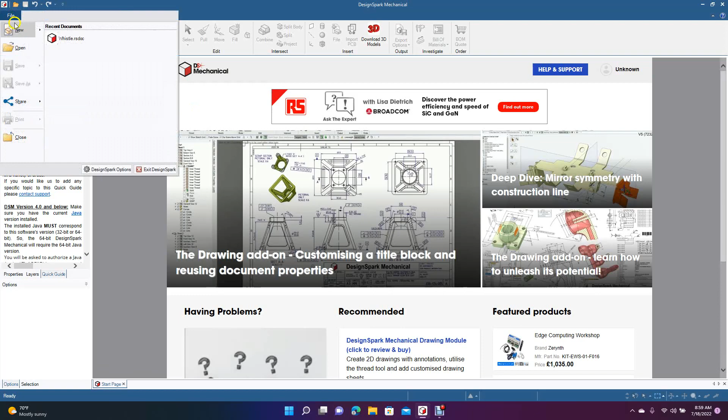So we're going to create a new design, make it plan view so it's flat, then come up to rectangle and define it from the center. We'll click, drag out, and I'll show you how to use the split body command. We're going to make a rectangle 38 by 6, then draw a piece in the middle.

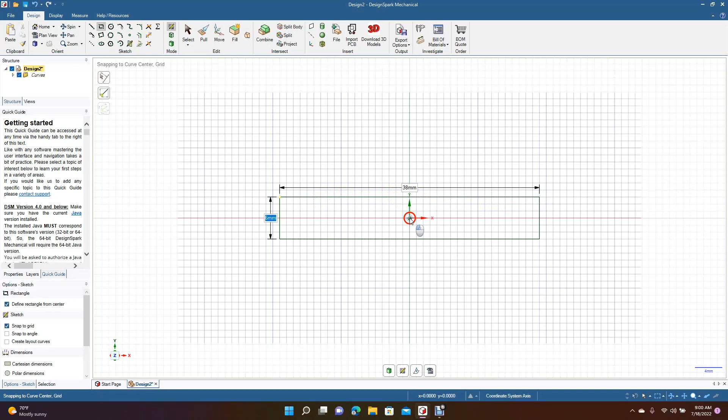We can do the same thing there, go 30 by 8, that's fine. Now we're going to click off, grab our trim away tool, and get rid of these inside pieces.

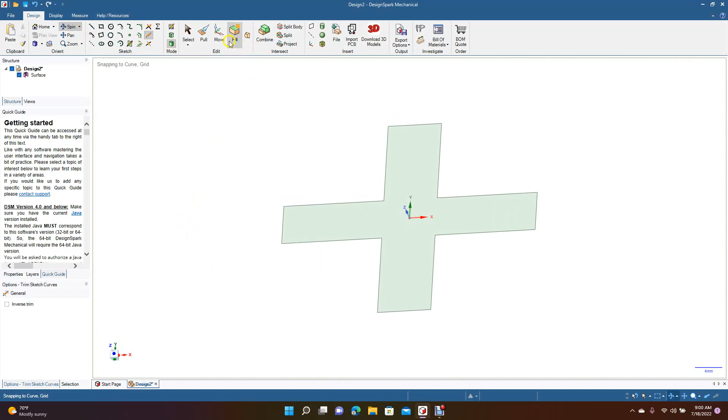Now we're going to go to 3D mode, spin that a little bit, and give it some depth. So we'll go to pull, click on it, and pull this up. Let's undo that - let's click on it and just put 5 millimeters in there. Type 5 and hit enter.

Now I'm going to show you how to use split body. You come up here to this command, split body, and then you'll click here, and then click here. Let's try that again - split body. We'll go here, and then here. Okay, so that cuts a piece here.

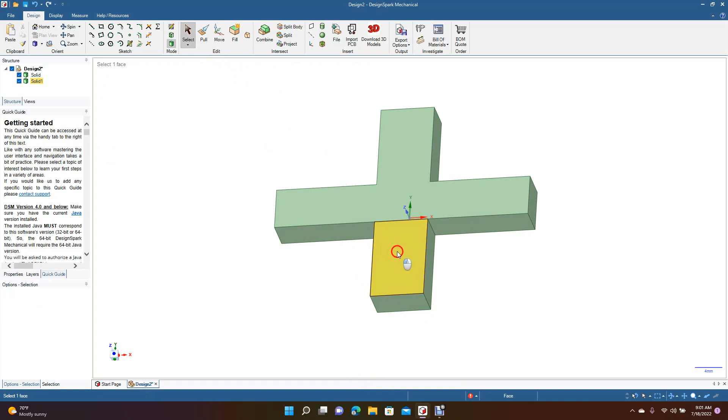So now you have two solids - you have that piece, and then this piece that we cut. So now you can move that piece away, right there.

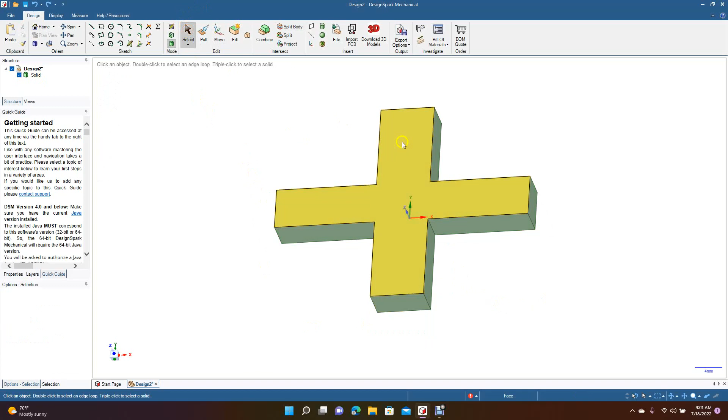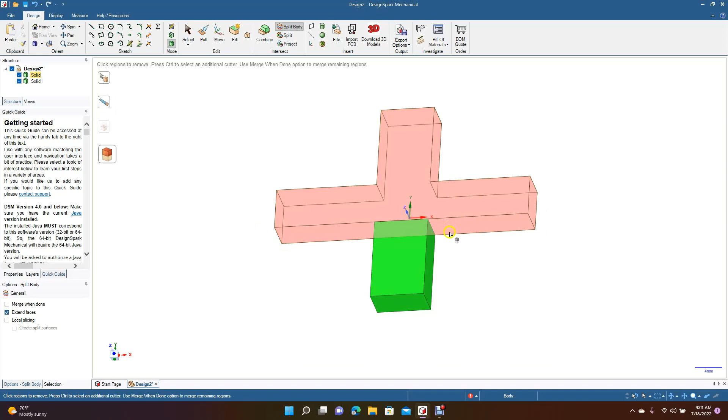Let's go ahead and do that again - we'll undo a couple times to get back to here. This would be your basic shape, and if you want to trim it, you hit split body. Up here it's telling you to click on a target object, so you want it to be this, and then it's asking you to click on a face, plane, or edge loop to use as the cutter. So we'll go here this time, click here, and now it's going to cut along this line.

So now you've got two solids, and you can use this solid to move. Let's grab the green and move that out of the way. You could do the same over here on this piece - you just have to spin it around so you're able to see the top part.

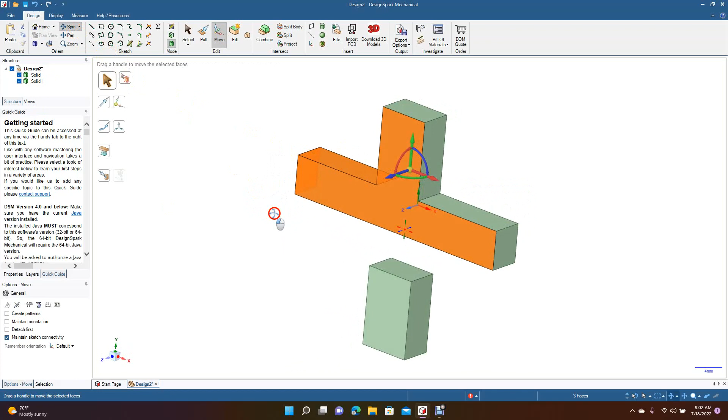So what you could do there is, if you wanted to split that, you go to split body, select this top surface as your target, and click this piece here. And now you actually have 3 pieces, so you should have 3 bodies - that piece there, which we can click on and move, and then the middle piece. So that's the split body feature in DesignSpark Mechanical.

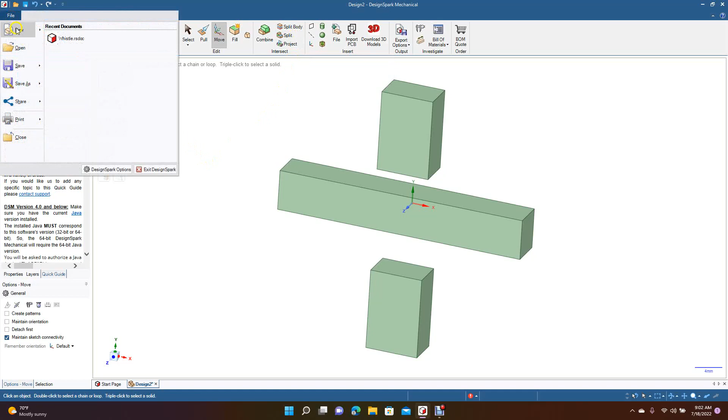Now we're going to create another new document. I'm going to show you how to draw stuff on opposing angles, and you'll know in a minute what I mean by that. We're going to do the same thing in millimeters here, click this plan view, and then draw a line.

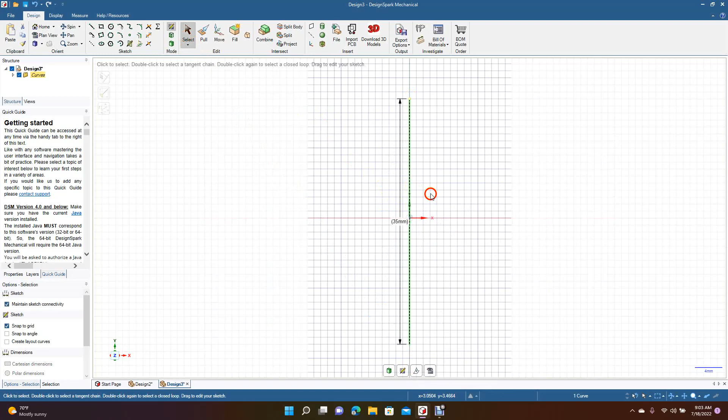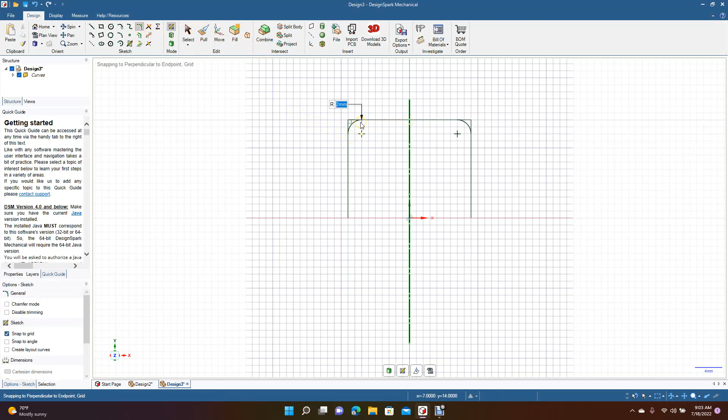So I'm going to put a line in the middle here because we're going to use this as a mirror line. We'll right mouse click on that, set as mirror - actually, right mouse click, turn off that, right mouse click, set as mirror. Okay, now we're going to draw a line up here, straight over. Now we'll come in here and do the create rounded corners, and just do a 2mm line in there.

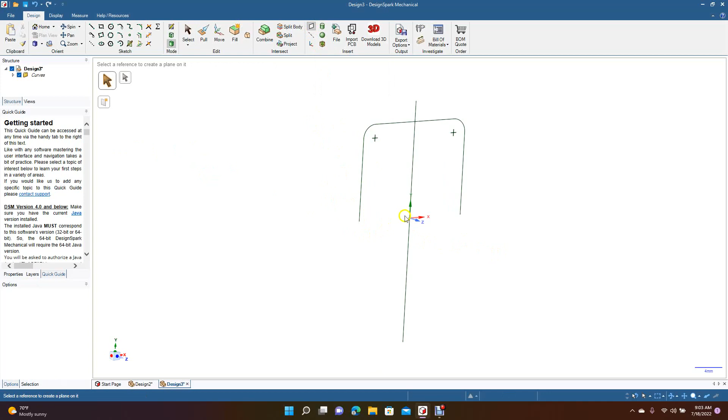And then now we'll go to 3D mode. So what I mean by opposing directions is if we want to make a part and we want the part to be coming out this way, you go ahead and click on your plane. Then you're going to come over here and find the plane that you need to draw on.

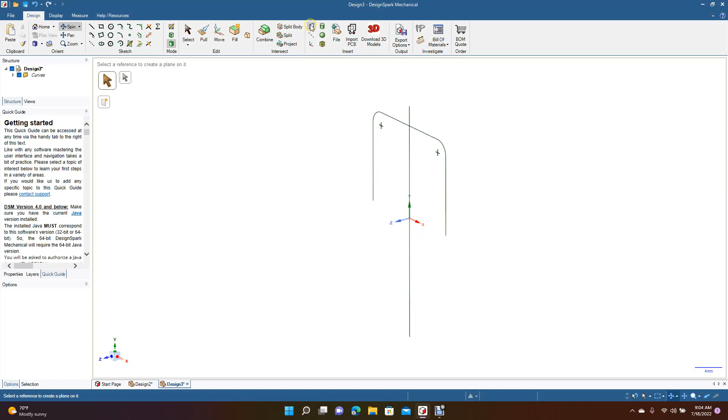Let's spin this some more. Let's go ahead and spin this, spin it this way. Okay, and then we'll go ahead and click the plane up here, and then we're going to go ahead and put...

I think that line is kind of interfering with stuff, so we're going to get rid of our mirror line. Let's just click on it, hit delete.

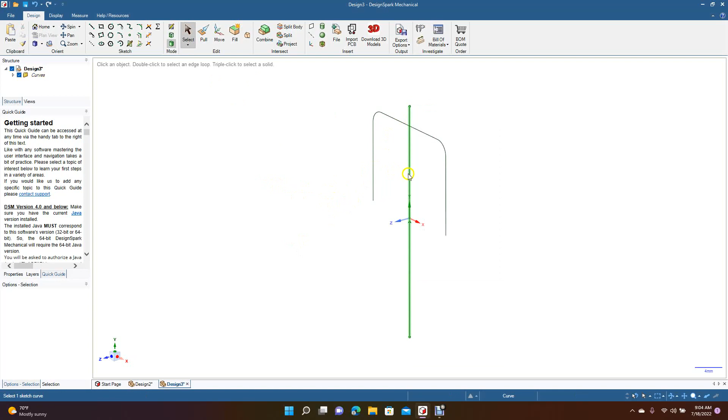All right, now go ahead and go up to plane. Okay, there we go. We want this bottom plane, so just go ahead and click there. We got some extra ones, but we can just get rid of those.

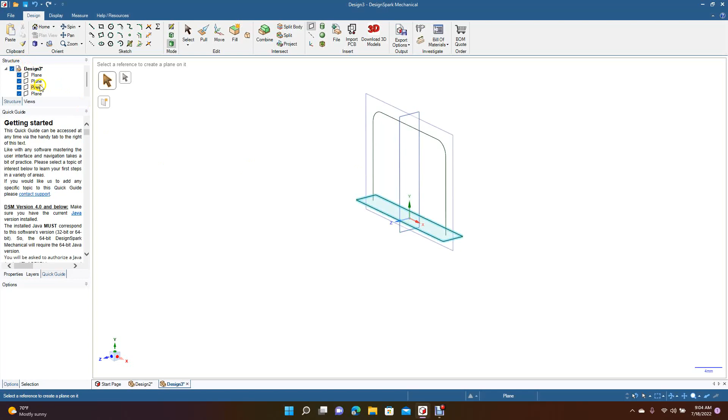So let's get rid of that one, and just come up here in your structure tree to get rid of a plane. We want to get rid of that one, we don't need it, so just hit delete.

Or come over here, select the plane, right mouse click, delete. I don't know why it's not deleting. Let's go to select. Right mouse click, delete. It's kind of weird, it's not deleting our plane.

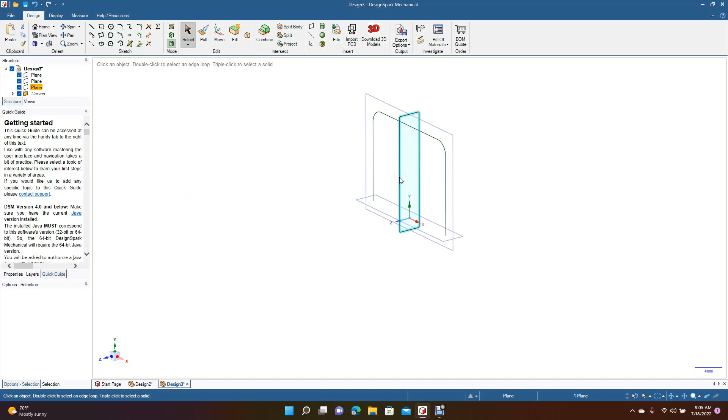Okay, there we go. So now what we're going to do is we have this part here, so we're going to go ahead and rotate this view, rotate it like this. And then we're going to select this plane, and come over here to plan view and make sure that's straight.

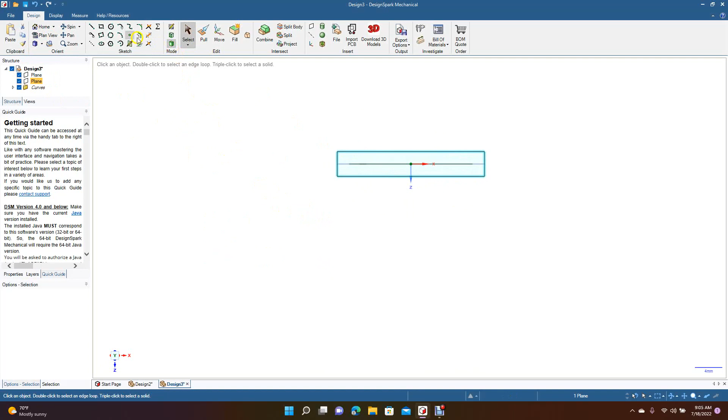Okay, now we're going to go to our line tool, and you're going to find the end of that part there. So now we're going to draw a part going up like this.

Then we're going to come over, and then we're going to come down to the end. Actually, it's over there. Okay, let's undo that, undo a couple of undos.

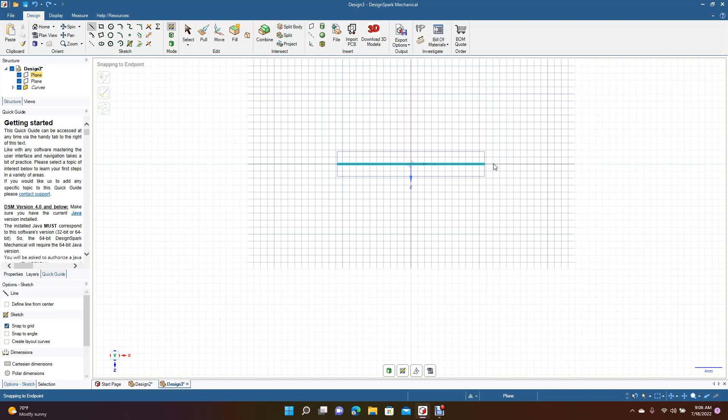We can do the same thing we did when we drew this part. We're going to go ahead and put a line there, straight in the middle. Go ahead and right mouse click on it, set as mirror, and then we'll get our line tool again.

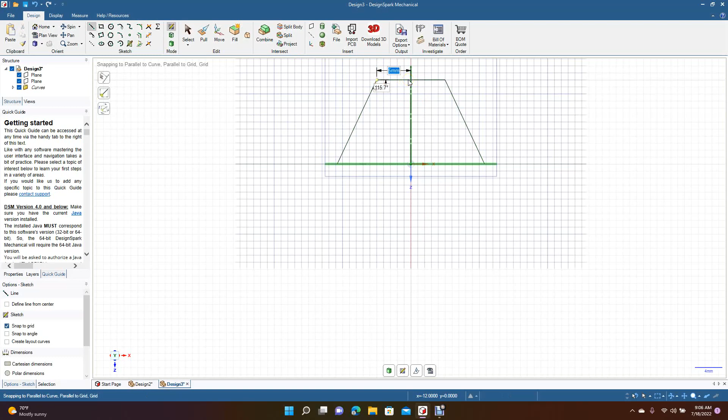And now we're going to go, I'm just going to make this an angled line so it's a little more interesting. So we're going to go to there and then we'll just come in. Alright, now you're going to pan this down a little bit.

Now we're going to put a 3-point arc line in there, but first we're going to get rid of this line there. We're going to get our 3-point arc and we'll come from endpoint to endpoint, and then we'll just make this round.

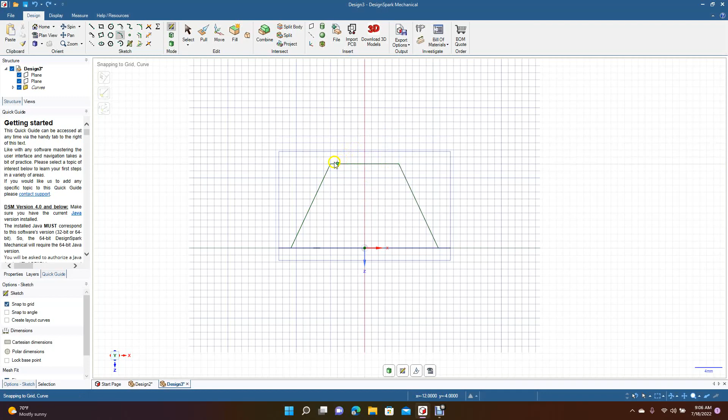Oh, undo that, that wasn't how round I wanted it to be. Okay, so right there, so click.

Okay, now we're going to get our trim away. We're going to trim away this, okay, those two. All right, now let's go to our 3D mode, which is this one, and we're going to go ahead and spin this.

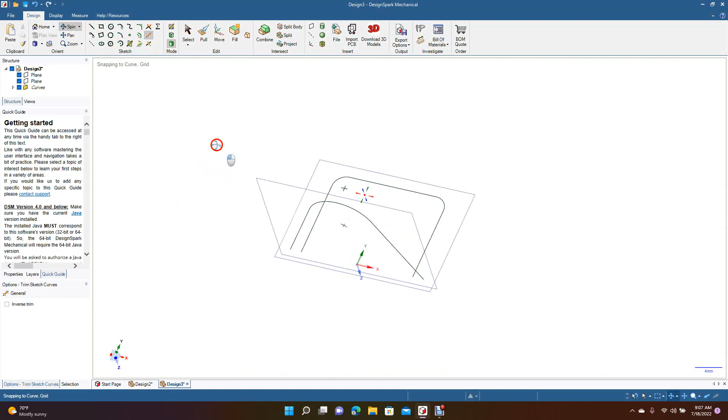Okay, these should have been connected. They weren't, so I guess when I drew them, we're going to have to go back and undo that. So let's go ahead and undo.

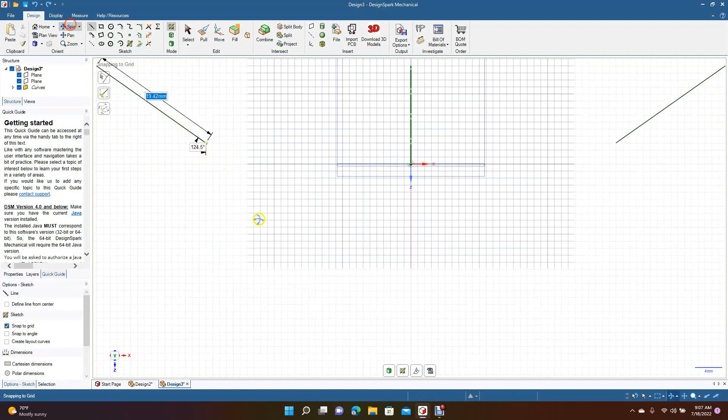Okay, so let's go ahead and spin this a little quick here to see where our lines are. Actually, undo that, keep adding stuff.

Okay, let's go to the 3D mode. Okay, here's the point there. Okay, now you're going to click on this plane. Let's make sure that's activated as our line.

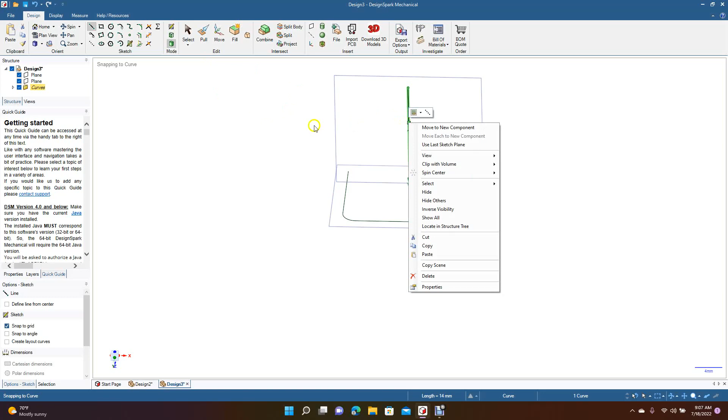Alright, so we're going to go, let's do this again. Let's spin this. Okay, let's go ahead and click on there. Let's go to plan view. Let's get our line.

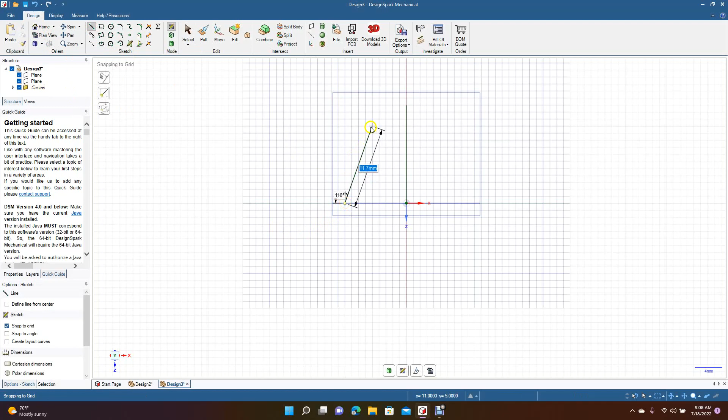I think it's here. Okay, so we'll just go up. Actually, let's undo this a couple of times. Sorry about all the undos. We're going to right mouse click, set as...

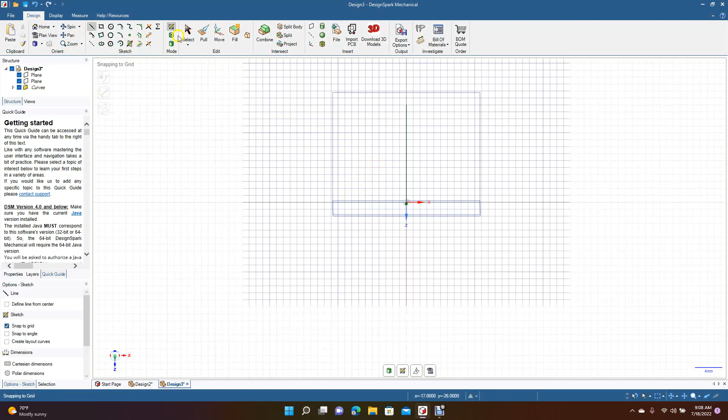...mirror. We're going to grab our line tool. Let's spin this a little bit to see where the, it looks like it's coming from there. So let's go ahead and get our line tool, and we're going to go to there.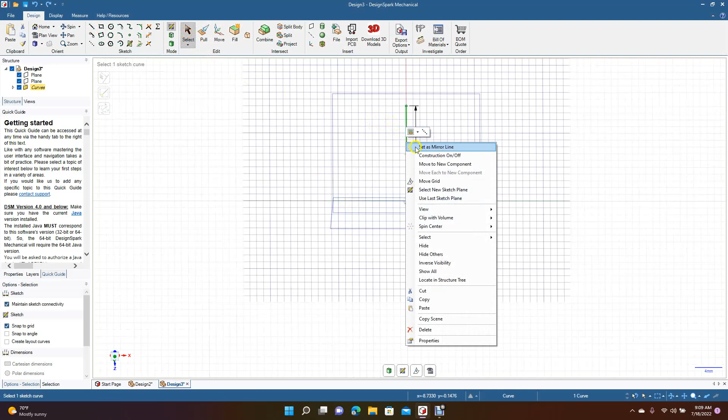All right, let's go ahead and get our line tool. It's right from there. Oops, undo, forgot to make this a mirror line. So set as mirror line, grab our line tool.

Okay, we're going to come straight up and then straight over. Okay, now we'll go back to 3D.

Okay, now they're connected. So now we're going to turn this way, click on this plane, and go to plan view. Make sure it's straight.

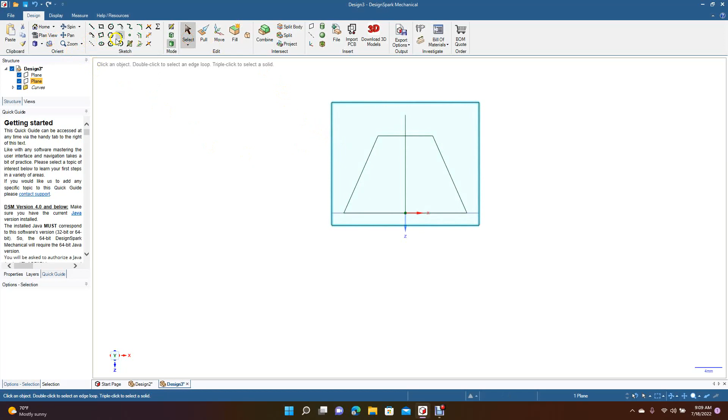Let's turn off the mirror line, we don't need that, actually let's get rid of it. We'll hit delete and get our 3-point arc. We're going from endpoint to endpoint, click there, and then we'll get our trim away tool. I'm going to trim away that piece and that piece.

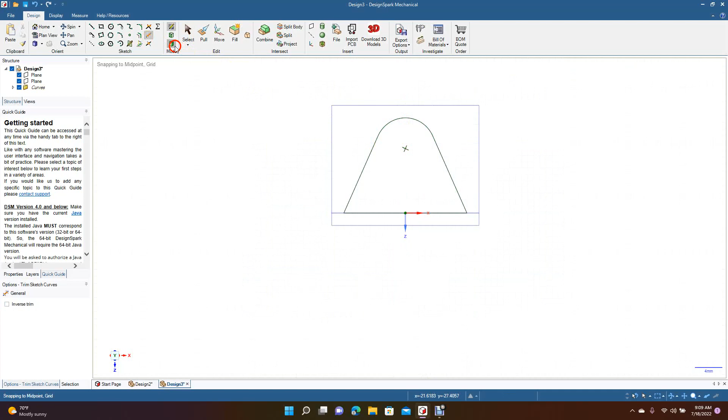Okay, now you're going to go back to 3D mode, go ahead and spin this. Now you have this kind of a looking shape here.

So it doesn't really matter where you put your circle, as long as it's on a little point. So we'll go ahead and select that point, get it until it's glowing green like that, then get your circle tool.

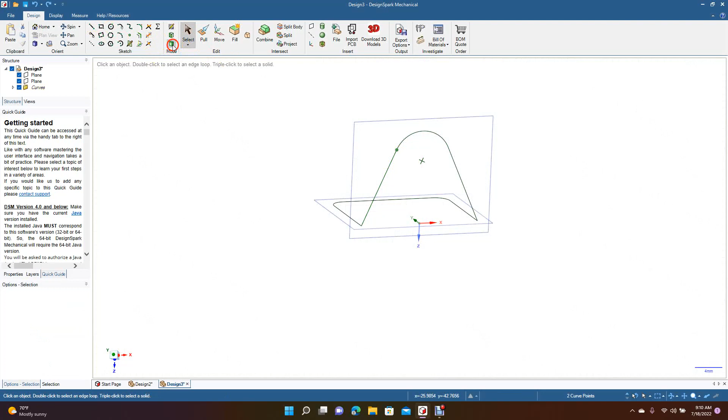Oh, that's not right. Let's go ahead and select this, undo, go to select, okay select it where it's like that. And then it should be on 3D mode, and get your circle. Doesn't seem to want to do that. All right, let's try it in this drawing view. Still not working right for me. All right, let's go to 3D mode.

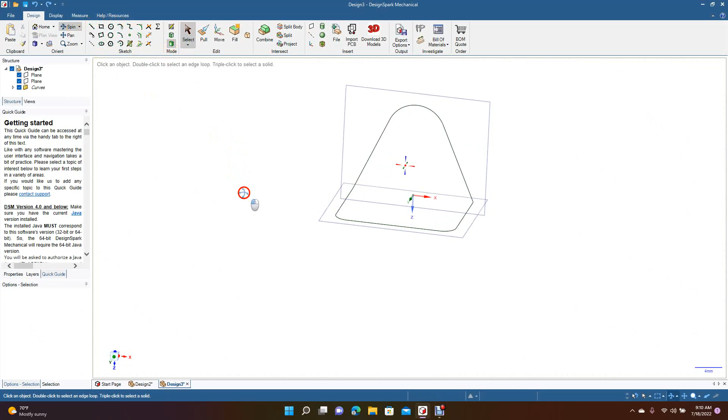All right, let's try it from a different spot, let's try it from this spot right here. Okay, let's go to the circle. Okay, there we go, now it's doing what it's supposed to do.

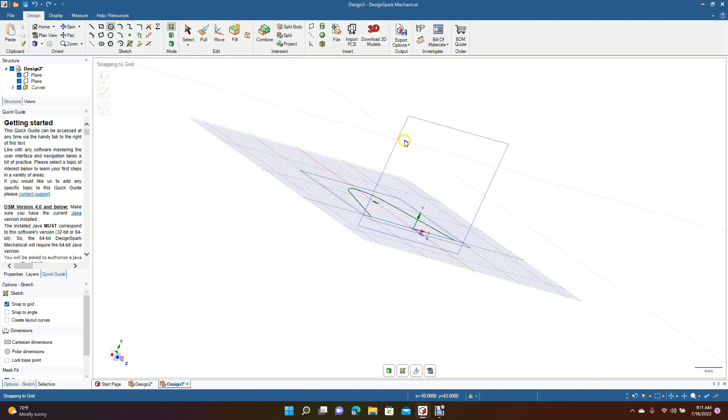I guess I can put the circle there. Let's try it, let's do 2 millimeters. And let's go to pull. Let's spin this. All right, I'm hoping this is going to be in the right spot. So let's Control plus to zoom in.

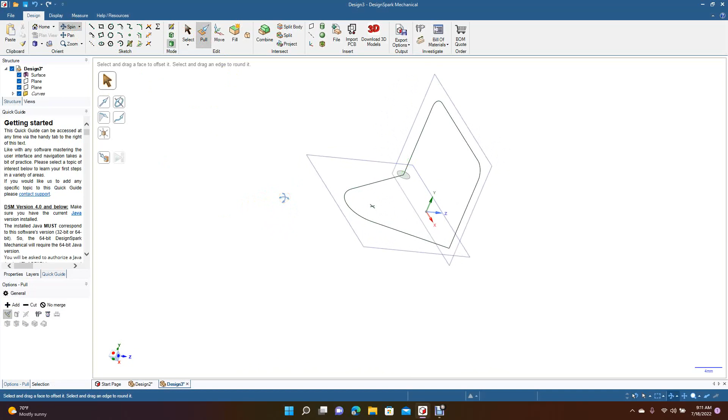We're going to get our create rounded corners tool, and we're going to create a rounded corner right there. Let's do 1 millimeter. 1 millimeter there, so now everything is round.

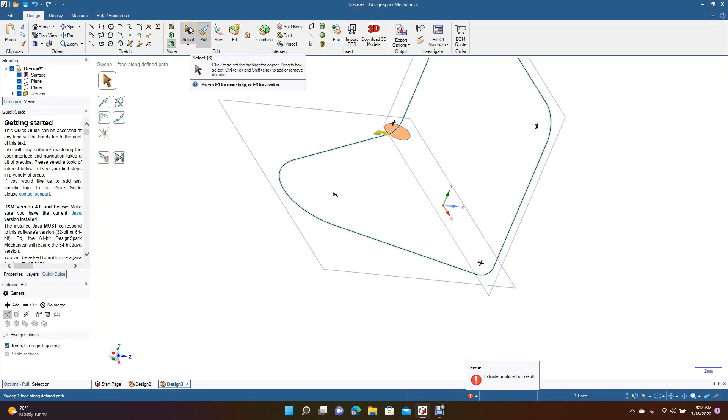So we might have to move that a little bit, but let's try without moving it. You're going to go to pull, and come over here to this icon, and click till everything's selected. I've noticed last time I had trouble doing this as well. I noticed with this kind of a change in direction of the planes, you have to actually pull this a little bit at a time. I'm not sure why, but it seems like I have to do one little area at a time. So let's go ahead and move this line, see if that makes a difference.

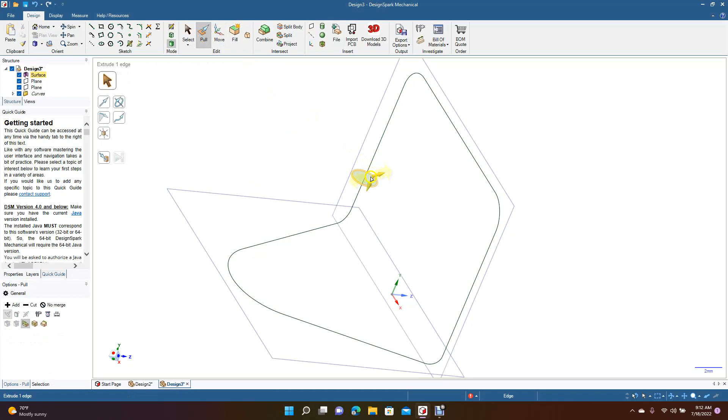Let's grab the blue and just kind of move that into the middle. Okay, now let's go ahead and try pulling. We'll click on this icon, which is a sweep, and then we'll go pull. Okay, it looks like that's going to work.

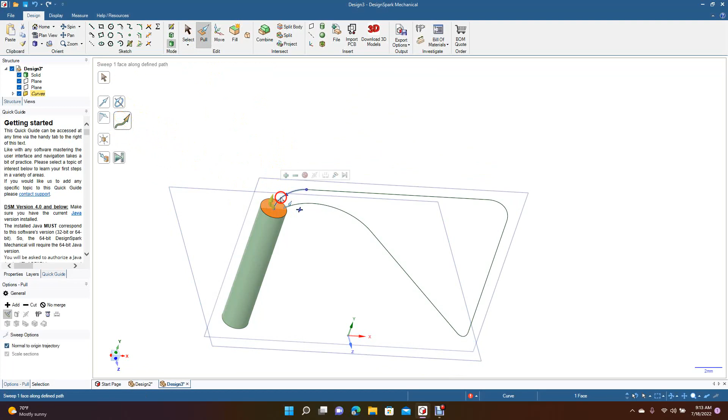So then we'll just have to work our way around, grab that, go to pull. Let's get this sweep, and let's get those few lines right there. Try it with more than one. Okay, there we go. All right, now we'll go ahead and spin this.

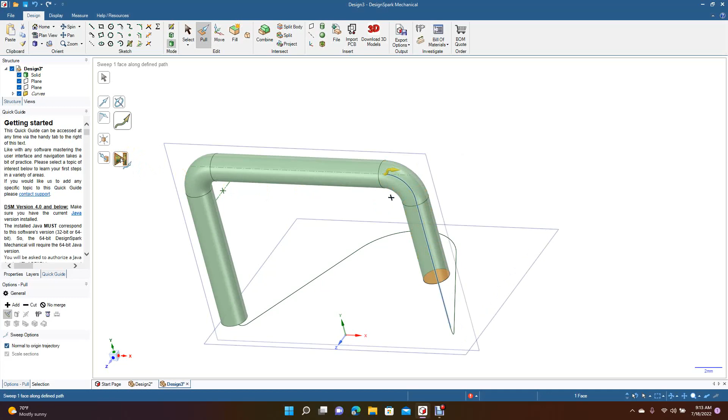Sometimes it's picky, sometimes this program is finicky, but it always seems to work. To get multiple lines, just hold down your control key and pull them around like this. This may be too big of a circle to round that corner, but we're going to find out. So we'll go to pull.

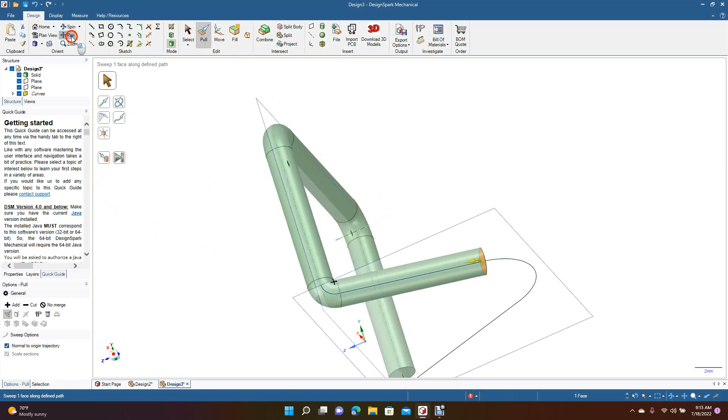We'll go to sweep, and we'll try to get that part right there. Oh, it looks like it went. Okay, so we're good. Now we'll go ahead and do the same thing, just click that line there, and then continue on here with these, see if it will do all those connection points. And it did. Okay, sometimes it's finicky, sometimes it's not, sometimes it works.

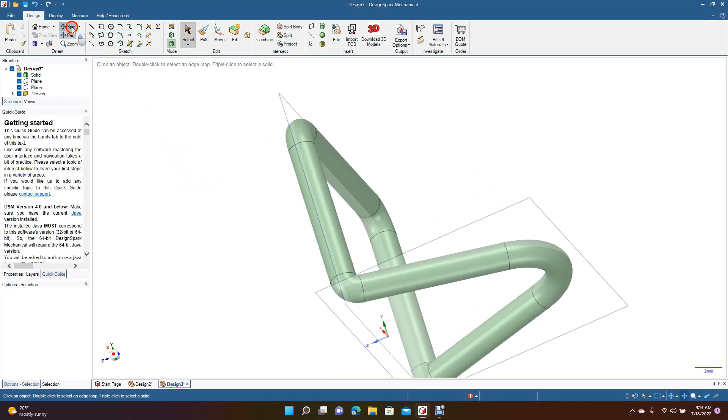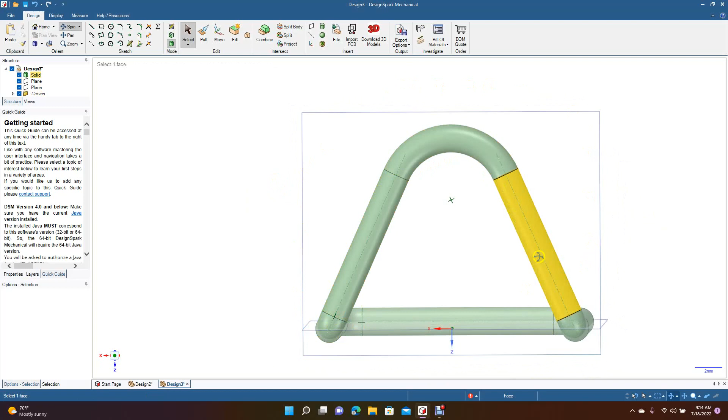So this is going to be your odd shape from different planes. You have basically a plane here, this first plane, where your drawing is going this way. And then you have another plane here, where your line, or your path, is going this way. So this is what you would do if you wanted to create a sweep that's not on the same plane. These planes you can uncheck in the structure tree and they'll turn off. So just go ahead, uncheck them if you don't want to get rid of them, Control minus. So this is going to be our part right here.

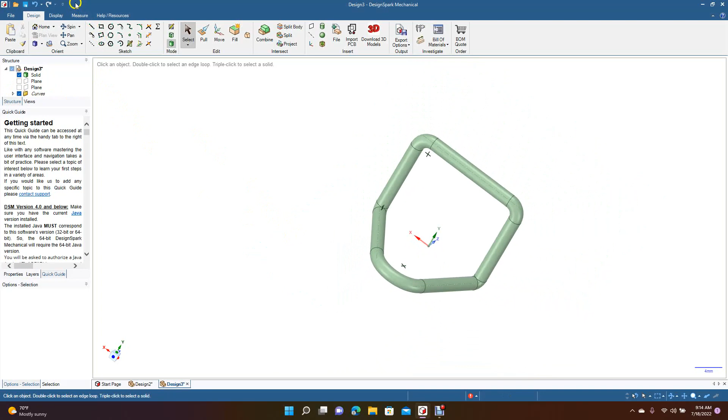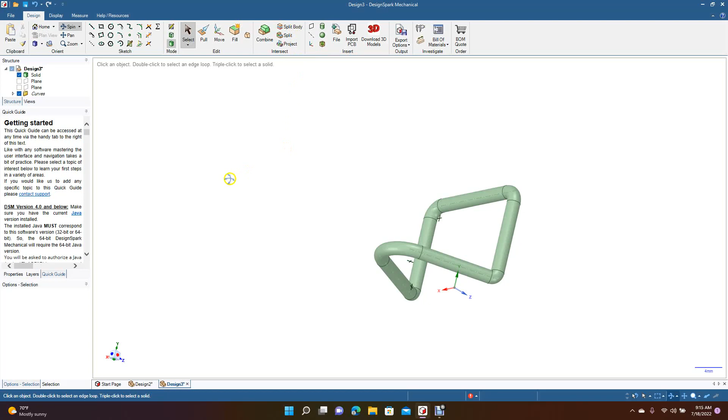So with this tutorial, we went over how to do the split body. This is a command or feature that you can use to create a part, and then split pieces of that part out. We start off with one part, use the split body command, and end up with 3 parts. This part here is basically made up of 2 planes, that plane there and this plane up here, with two different path directions to create that shape.

Okay, that's going to end today's tutorial. Hopefully you enjoyed watching and got something useful out of the video.